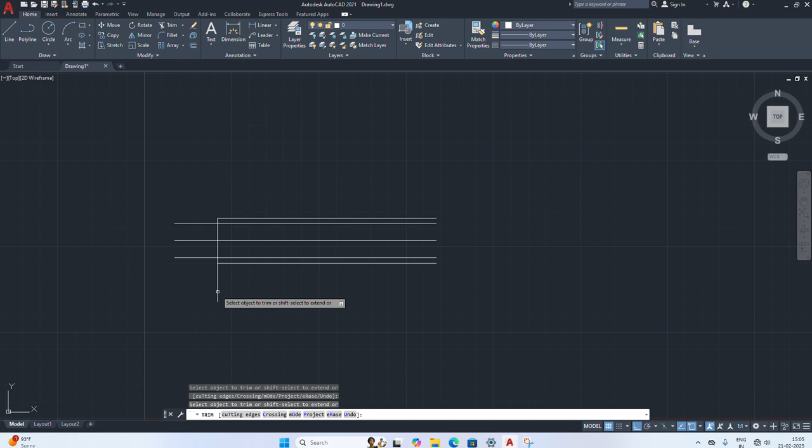Now trim this line, this one and this one, and also trim this line and this shaft extension.

Now since this is a long shaft, to show that it's a long shaft, we'll draw a line here like this, and then we want to draw a curve like this here. Just draw a straight line like this and an arc, a 3-point arc through these 3 points.

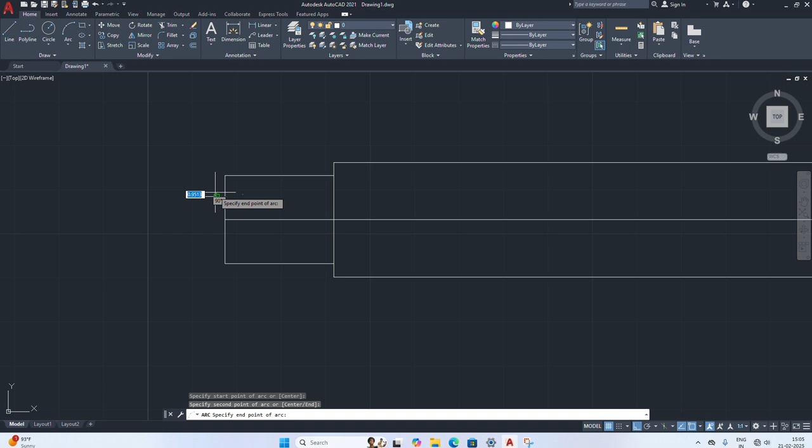Now let's take the mirror image of that one. Mirror this object, midpoint, 2 points here like this. Now we'll take the mirror image of this one downwards.

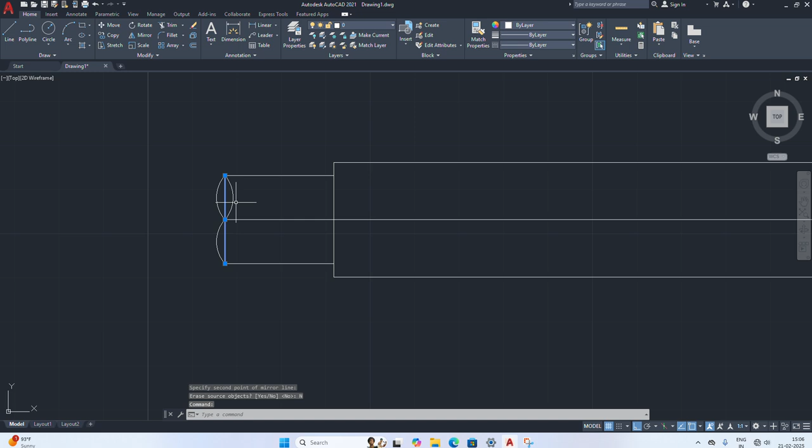Now we'll delete this center line. Delete. Now here, from here, this is the shaft, and here you have the eye end rod. First we are going to draw the eye end rod.

Now from here, at a distance of 35 mm, we want to draw a line. Before that, we will offset this line through 35 mm, this line to 35 mm like this.

Now this is 13 mm, so we'll take half of that, that is 6.5. Offset through 6.5, this line like this and this line like this.

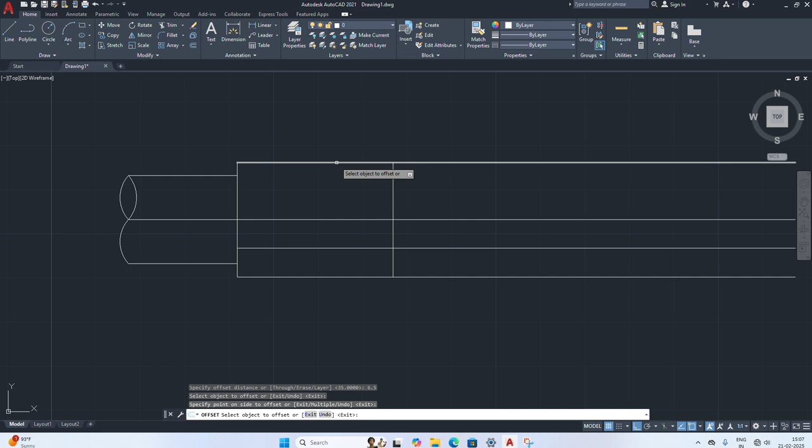Now let's offset this line through 2.5 mm, this line through 2.5 mm. Now again this is 6.5, we will offset half of that, that is 3.25 mm, this line like this.

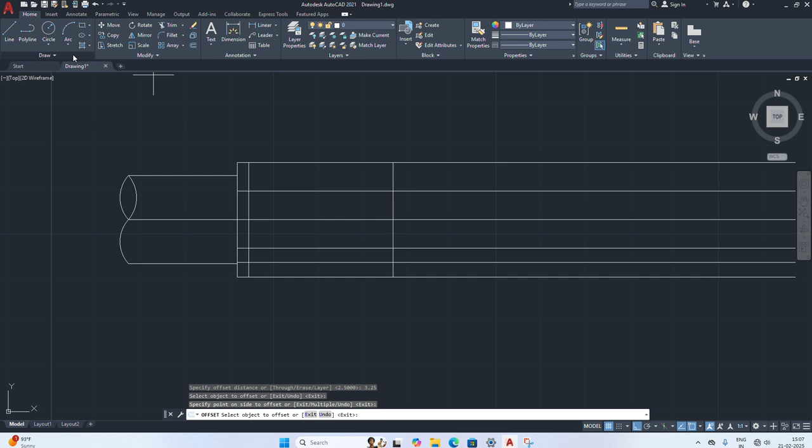Now we will draw an arc, through three points, 3-point arc starting from here, this point, and here this point. Then one more arc starting from here, this point, and here like this.

Now let us take the mirror image of this one. Mirror this one, starting one point and second point. Now let us delete this line and we'll trim this unwanted portion.

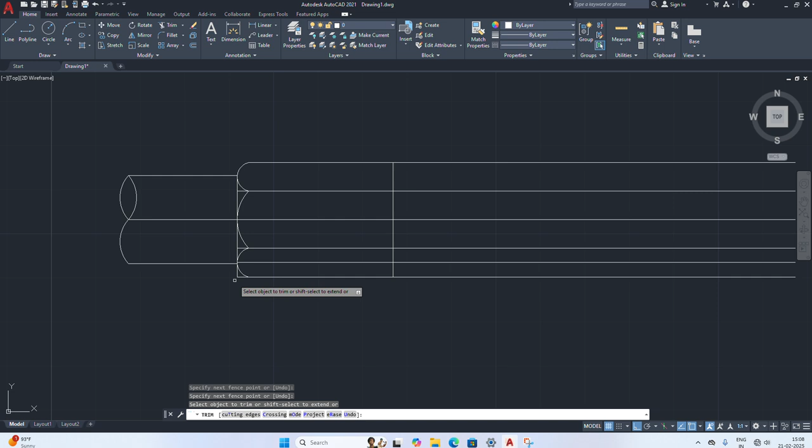Trim this portion, this small inner portion, and this portion. Enter. Now let us delete this line. Delete.

Now from here we want to draw a curve like this, an arc. So just draw a line like this, keep some distance from here, maybe 5 or 6 mm, just a line like this, and then draw one more line here like this, a small line like this.

Then we want to draw a curve like this. Let's move it slightly downwards. Now let's draw an arc, 3-point arc passing through these 3 points.

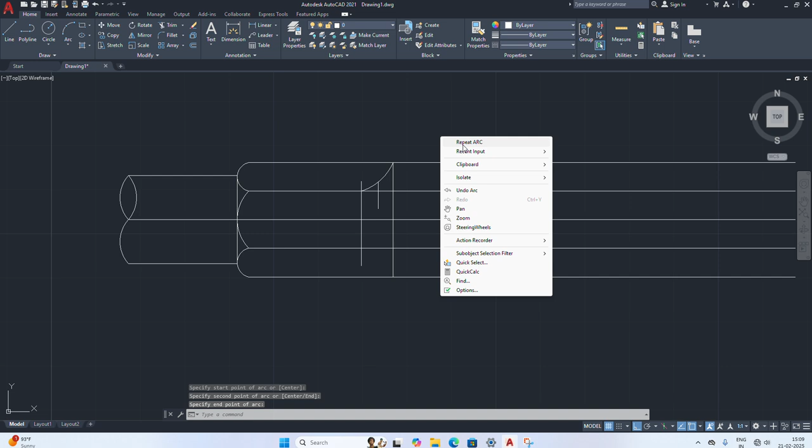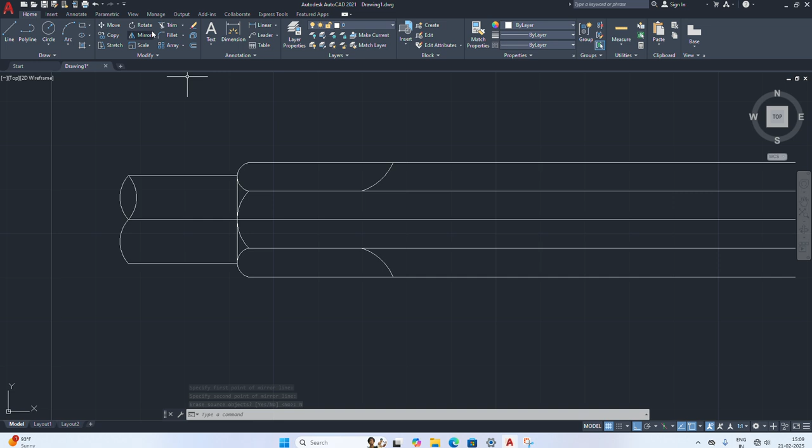Now delete this line, these 3 lines. Delete. Now take the mirror image of this one, mirror this line, this one and this one, mirror image of that one. Now let us trim this unwanted portion, this portion and this portion. So that's all.

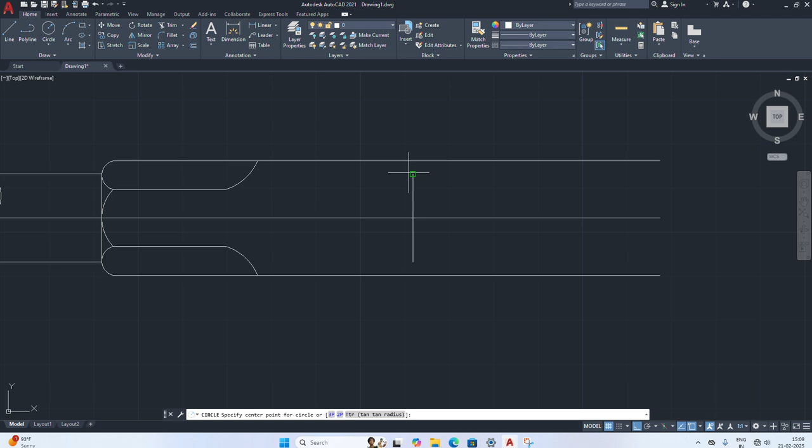Now the eye end, this is eye end rod, so the eye is at a distance of 70 mm from here. Offset this distance, that is 70 mm from here, this line here like this. Now this point is center, we'll draw a circle of radius 10 mm, and one more circle of radius 20 mm.

Now let us trim this unwanted portion. Trim this portion.

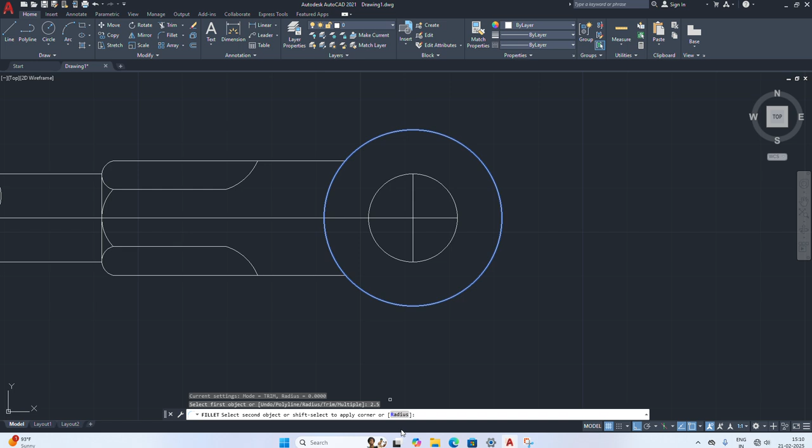Now after trimming we'll just keep a fillet of 2.5 mm here. So 2.5 mm fillet radius, this line and this line, fillet of 2.5 mm, 2.5 mm radius, fillet radius 2.5, again fillet 2.5.

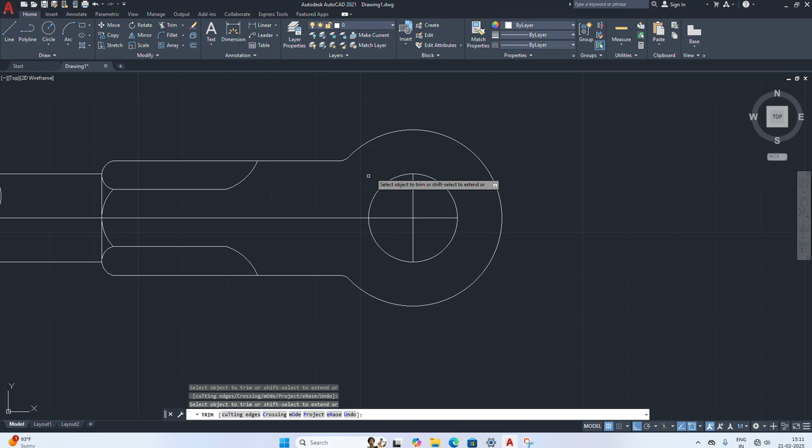I'll just trim this unwanted portion, trim this portion, and now we want to just draw a line here, like we want to draw an axis line. Just draw a line at say 3 or 4 mm from here, then take mirror image of that one, this one here like this, then extend this line to meet that line.

Now we'll just draw one more line on the right side like this. Now let us extend this line also, extend this line to meet that line. Now just delete this 3 lines, this one and this line, delete that. So now we'll change the line type.

For that just by layer, other, you want to load lines, we'll just add some dotted lines and chain lines. Center line, load, center 2x, center .5x, center 2x. Okay, now some more dotted lines are there.

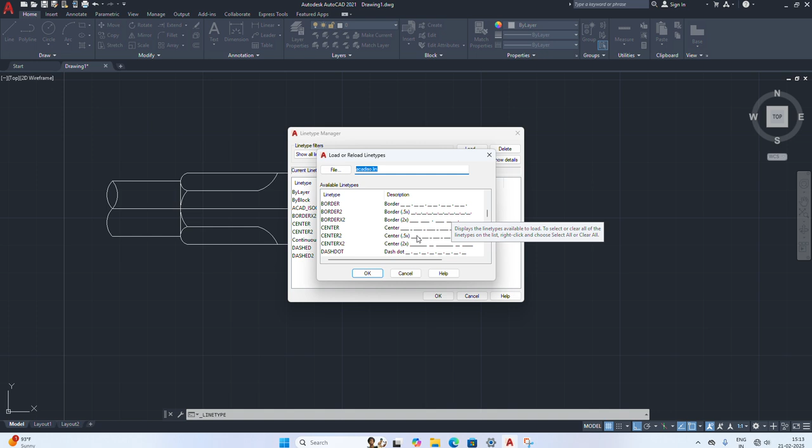Dashed line, then dashed 0.5, dashed 5x and dashed 2x. Dashed 2x, dash 2x. Okay, now close that.

Now just select this line, and this line, and this is center line. Which one is better? This one is better, so we'll use that line. Okay, now that is okay.

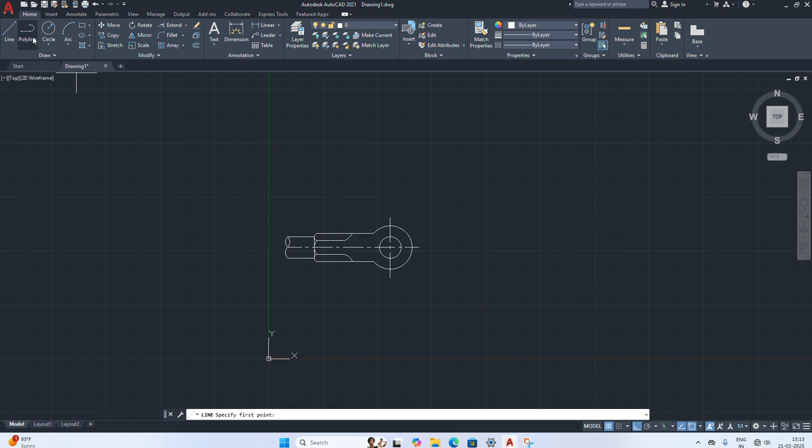Now the top view of the eye end is ready. Now we will draw the front view also. Just pan it. Now just draw a line like this at some distance like this. Take mirror image of this one. Mirror of this one. Base point is this one and this one.

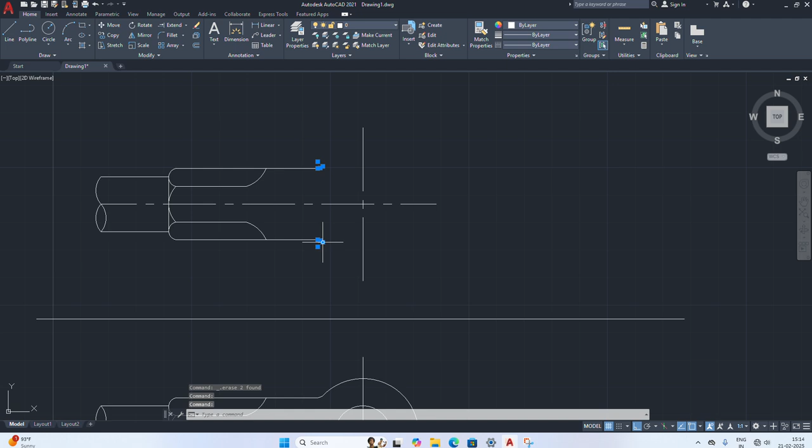Okay, now we don't want this curve here. You will delete this curve, delete, and this small curve also, delete that. Now in front view we have a rectangle here, so for that draw a line, just a line from this corner, straight line like this, and extend this line to meet that line, extend this line to meet that line.

Now just to draw a line, straight line from here also, a line like this, one more line from here like this. Now we'll trim unwanted lines, trim all these three lines, these three lines, these three lines. Okay, so that is the front view of the eye end.

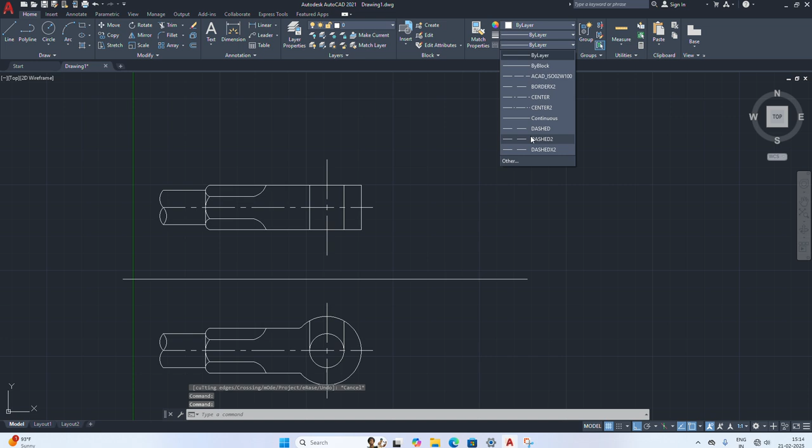Now we'll just make these two lines dotted line, that is invisible line. So we just go through this, which one is this one we can use. We'll make those two lines dotted line. Okay, so that is the front view and top view of the eye end.

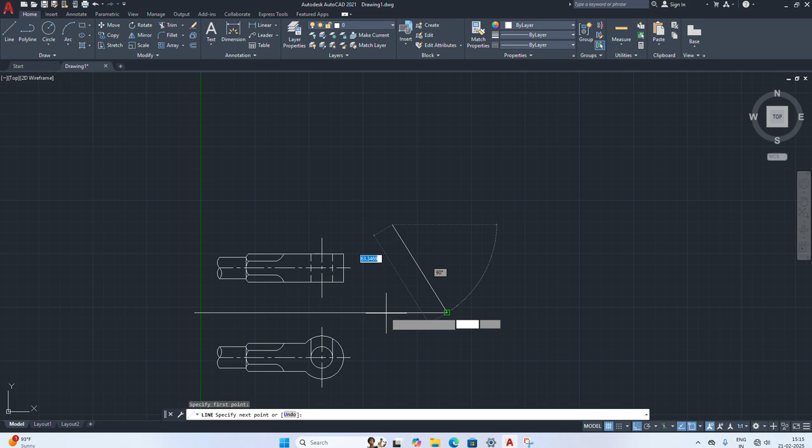Now we have the fork end rod. So in fork end we have, first we will take the mirror image of this one. Just draw a line like this, a straight line like this. Now okay, now let us take the mirror image of these two. Mirror of this one and this one, based on this one and this point. Okay, so mirror image of that one.

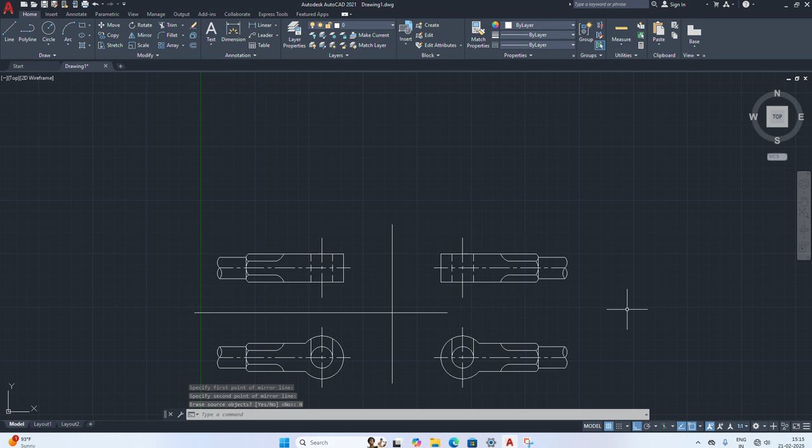Okay, now here's the mirror image, the fork end also will be similar to this one, but slightly length will be slightly more. So what we'll do is draw a line like this, just draw a straight line like this, and we will trim this line here. Okay, trim this portion and this portion, and now similarly we will just extend this line there.

Okay, just extend this line to meet that line, and we will trim that smaller portion, trim that line. Okay, now what we will do is, okay, we'll just move this line away. Okay, so just we'll copy this diagram, just move. Okay, just move this diagram like this.

Now from this center to this point, distance is 60 mm. So we will offset this line through 60 mm, offset through 60 this line, center line like this. Okay, now we will extend this line to meet that line, extend this line to meet that line.

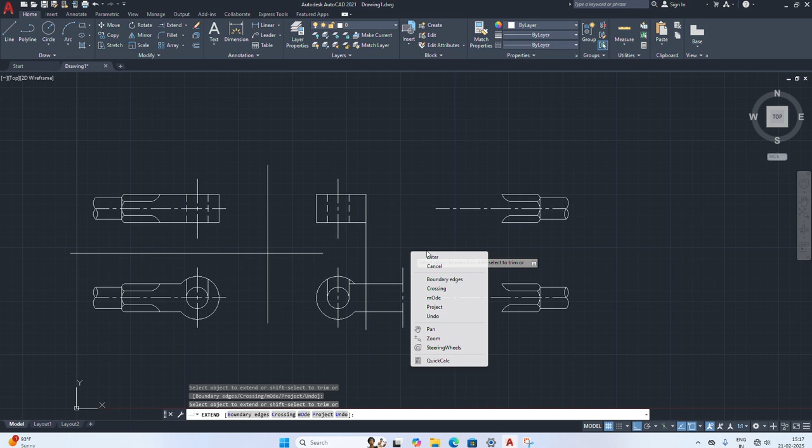Okay, now we will just move this like this. So just move these two based on this point, bring it there. So that's all. Now we'll just extend this line to meet there, extend.

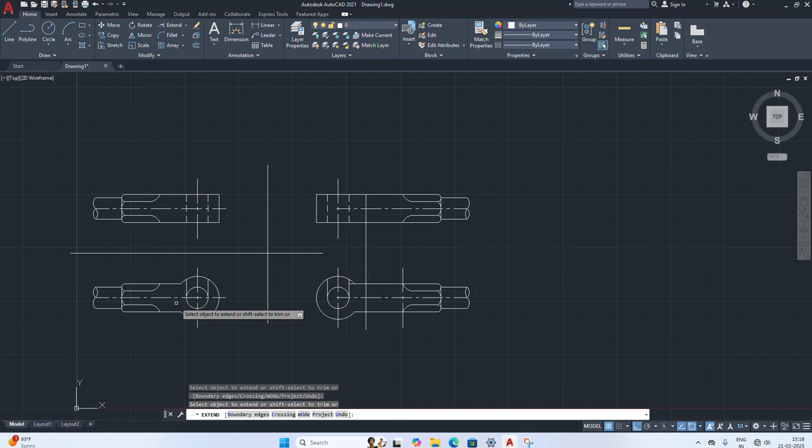Now, we'll extend this line to meet there. So now the top view of the fork end is similar to this one, but slightly of longer length.

Now the front view has a slight modification. The shape is slightly different, so we will offset this line through 17 mm, and this line through 17 mm on this side. We will extend this line to meet that line, this line also to meet that line, and all these lines to meet that line. Now we will trim the unwanted portions.

From this center line, center of this circle, at a distance of 22 mm, we'll draw a line like this. Now this line we will offset through 22 mm. We'll delete these two lines, we don't want them. This line we will offset through 22 mm like this.

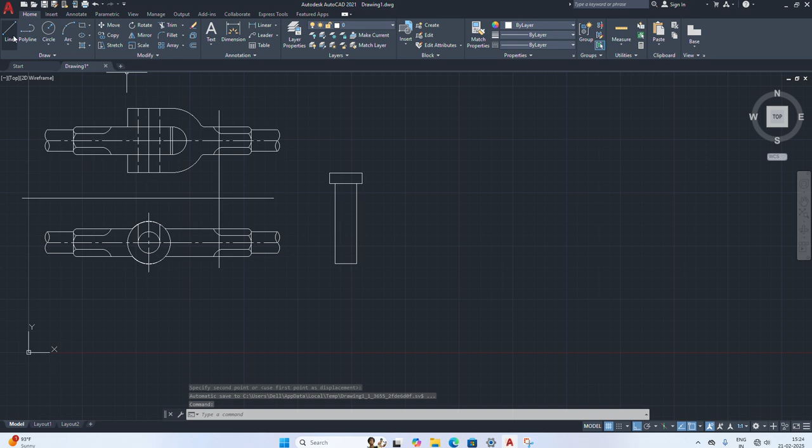Now we will move the top view downwards, and the front view slightly upwards. Now we will place this pin. For that we want a base point, which will be the center of this line. Select this one, base point is mid of this line, and we'll keep it there. So that is the pin.

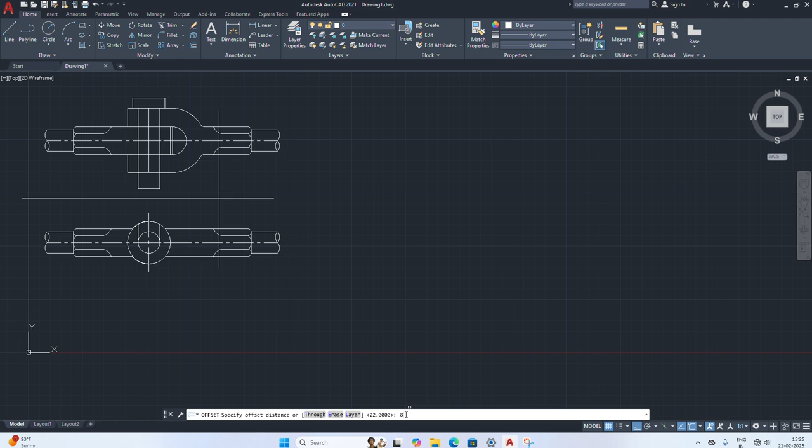Now here we want the tapered collar, so we can draw a line like this from here. We will offset this line through about 5-6 mm, offset through 6 mm. Just rotate it, offset that through 7 mm, and offset that through 8 mm, this line through 8 mm.

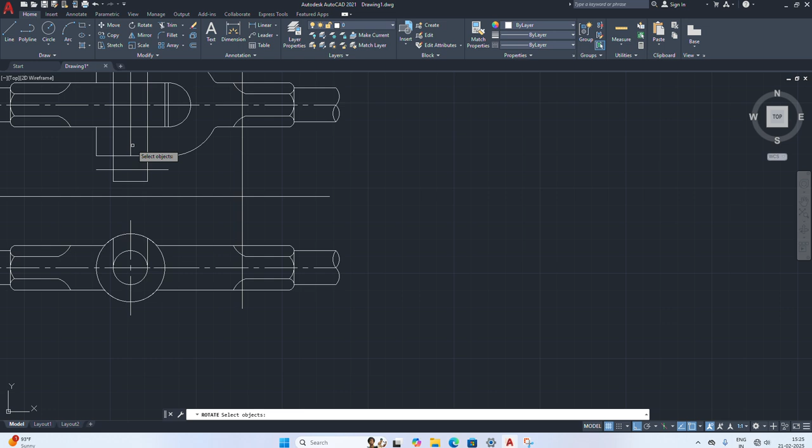Now let's zoom it. With this one we will rotate it through this line, based on this point, rotate through say 4 or 5 degrees. 5 is too much, so rotate through 3 degrees. Rotate this one based on 3 degrees. Enter. Okay, 3 also is too much, let us rotate it through 2 degrees. Rotate this one through 2 degrees.

Okay, now that's all. Now we'll take a mirror image of this one. Just measure this dimension, somewhere here, measure this dimension.

From here to this is coming as 6.5. Let us draw a line from here, a line of length say 3.2 or 3.1.

Now we'll take mirror image of this one, like this. Now let us do one thing, just delete this line also. Just move these two lines slightly downwards like this.

Now close this end, this end also, enter. Now we want to make a copy of this one and keep it below.

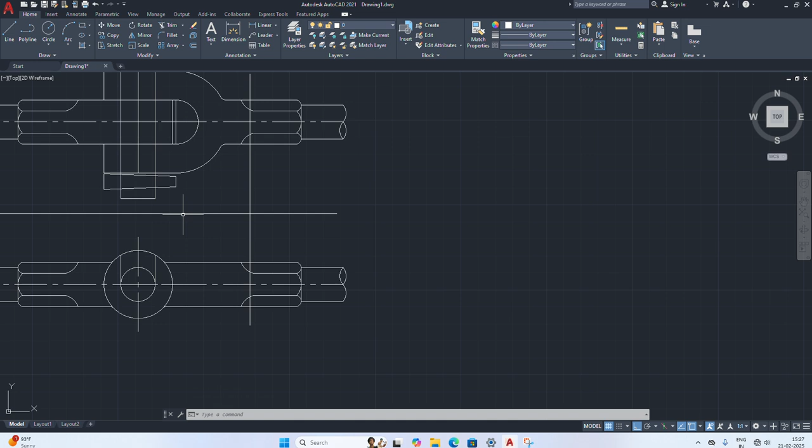This pin is slightly more length, so we'll move it towards left. This object is slightly more length, so we don't want this much long pin. Just move it like this, slightly upwards like this. This is enough.

Now delete this line, just draw a line like this from here, F8 on, like this. Now trim this unwanted portion - this portion, this portion, this one, and this one.

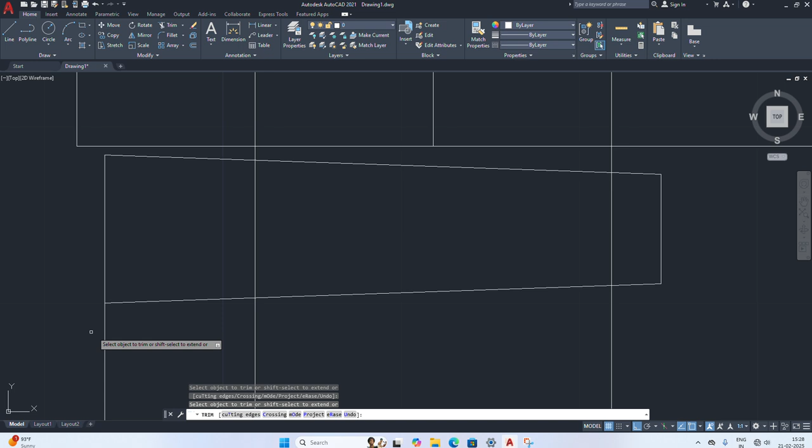Okay, now pan, we will just make a copy of this one and move this one. Base point is mid of this line, and place it, F8 on, place it there.

Undo, copy. Just move it slightly towards right, move slightly towards right. Now we will make a copy of this one, this one, this one, this one. Base point is mid of this one and place it on that line.

Draw a line from here to that straight line. Okay, now we will copy this one, this one, this one like this. Then base point will take mid of this one and keep it there.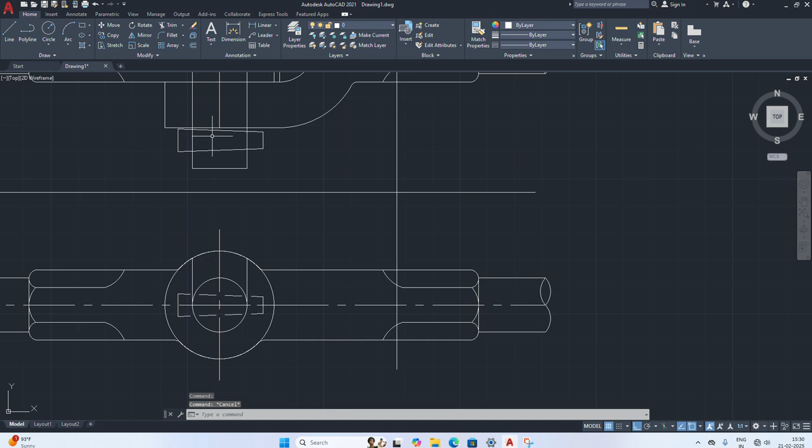Okay, now we'll just delete this line. Now all these lines should be dotted in top view because these are all invisible portions. So this one, just make it a dotted line, dashed line. Escape. Now if we want, we can trim this portion, and again trim this one and this one.

Again we will draw one more line, same line like that, so that we can make that part only dotted line. Now select these two lines and make those two lines dotted. Okay, now that's all.

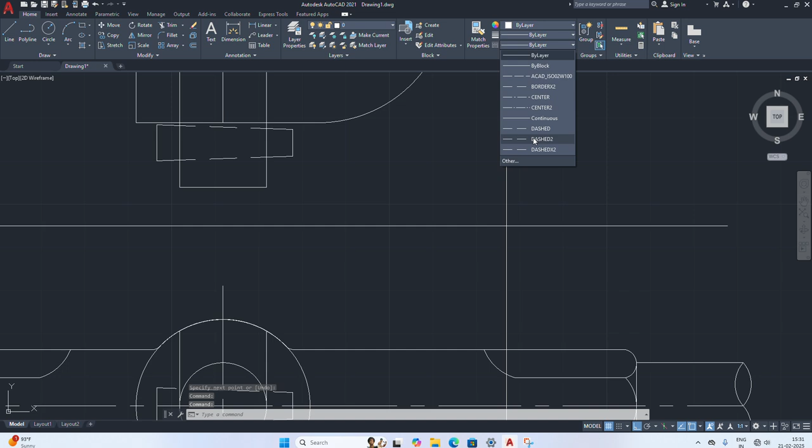So that is the front view and top view of the knuckle joint. Now we want to draw the sections. Just delete these two lines, delete. Now we want to hatch that.

For hatching we will do one thing, just take upper half section only. So from here we'll draw a line like this, a slant line. Okay, then just trim that.

Now just hatch - this option will select, and distance will be 0.6, enter. Okay, now this portion also. So that's all about sectional.

Now if you want, you can hatch this portion also, but with some other angle. Undo, hatch, this option, 0.6, 90 hatch angle, 0.5 mm is the gap. Enter.

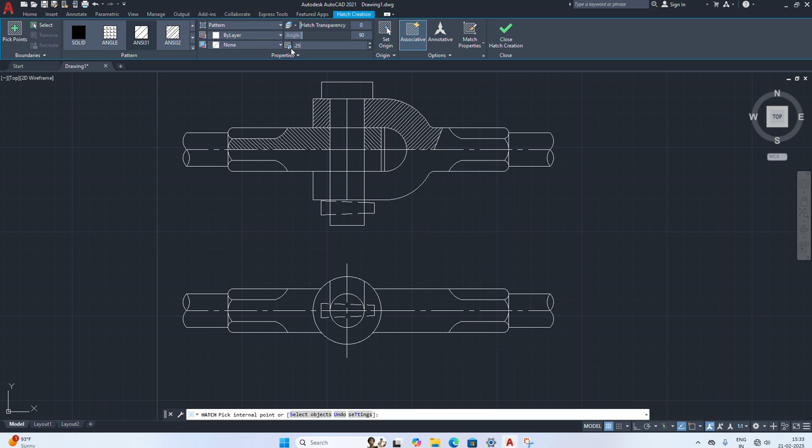So to hatch the shaft, hatch, there we will give the distance as 0.25. This portion, this portion, this portion, and this portion. Enter, escape.

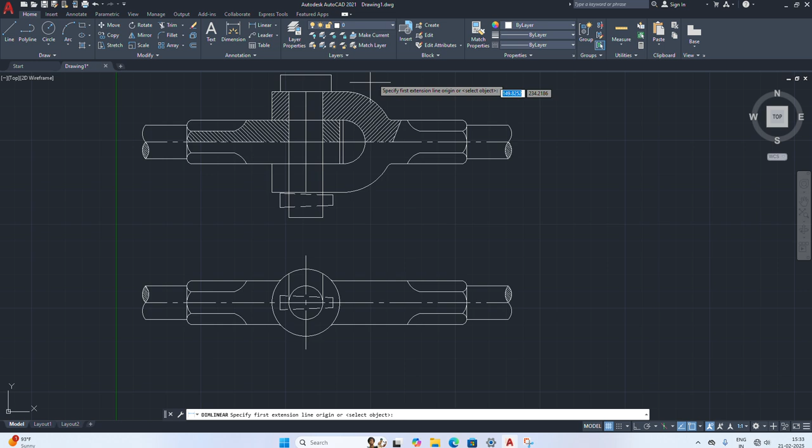So that's all about it. Now we'll just do some dimensions, linear dimensions. This one 20 mm, another dimension 26 mm.

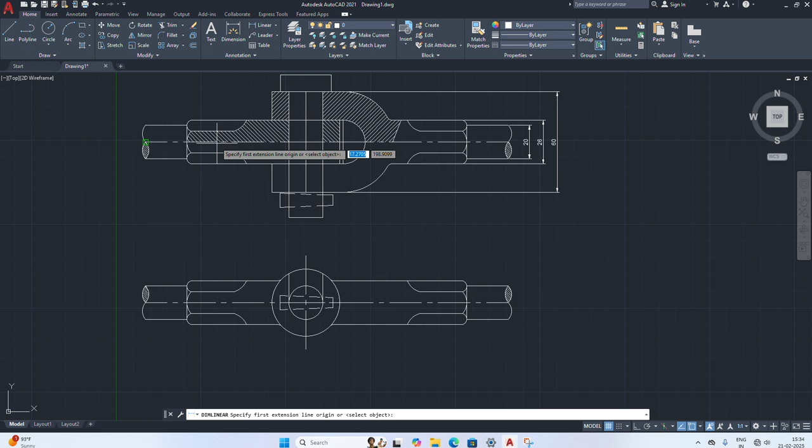Some dimensions we will give. Radius, this one, radius, this line, and radius, this length.

Some dimensions we will give. Now just make those dimensions bright using some brighter color. Select this, all this, and use some bright color.

Top view also we will give some dimensions. If we want, we can give top view also. Now we'll add text, single line text. The height will be 5 mm, angle 0, text is 'knuckle joint'.

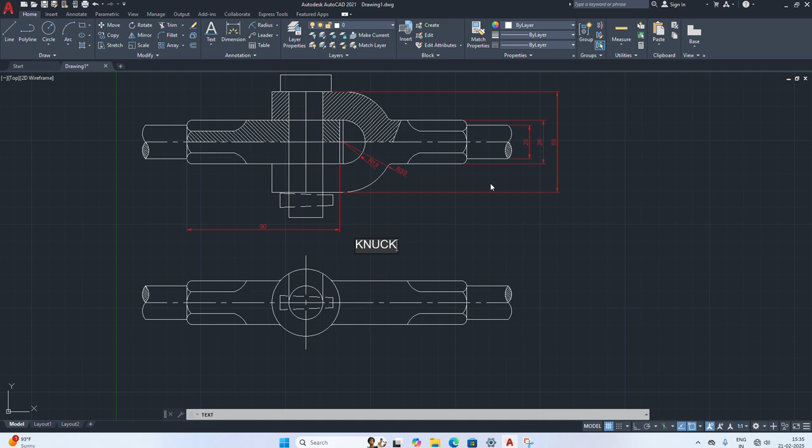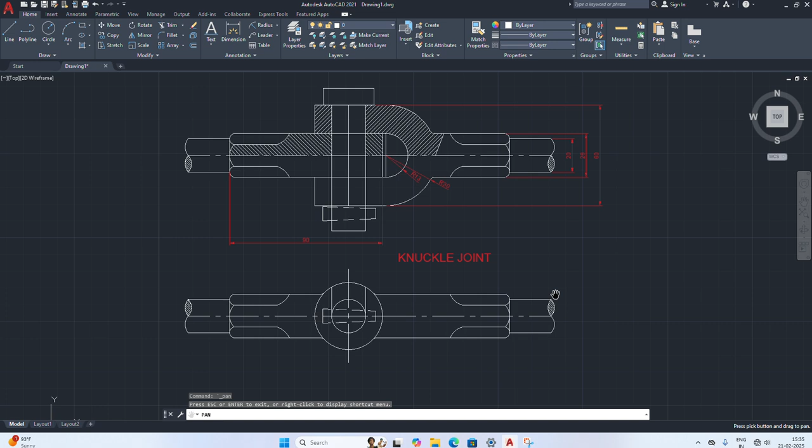Enter, escape. Just make that also red. So this is how you draw a knuckle joint. If you want, we can do dimensions of the top view also.